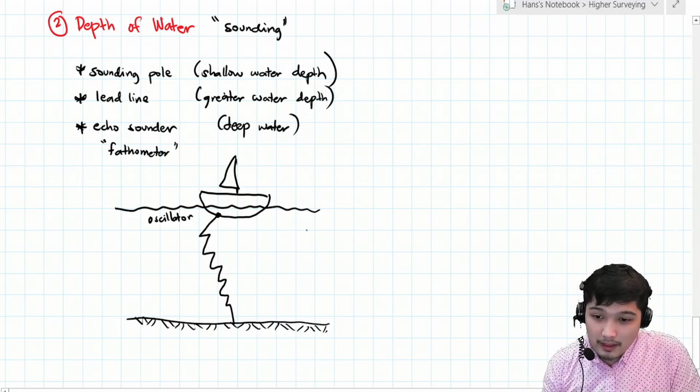Drawing lang konti. Let's say andito yung sounding vessel natin. Ito yung body of water, at somewhere here andito yung stream bed. Ganito yung gagawin doon. Magi-install sa ilalim nung vessel niya, sounding vessel, nung oscillator. Itong oscillator, ito yung apparatus na magta-transmit nung sound waves doon sa ating water. Magta-transmit siya ng sound wave, at yung sound na yun magta-travel downward, hanggang sa ma-reach niya yung bottom, yung sound na yan ay mag-reflect upward. At dito sa kabilang side, nandito naman yung kanyang receiver, o yung hydrophone niya.

Ang gagawin lang dito, i-measure niya lang yung time na nag-elapse from the time na transmit niya yung wave hanggang na-receive dun sa receiver. Kukunin lang yung total time na yun. I-observe yung time, ayan, may check na yan. Ngayon, gagamit na lang tayo ng basic formula ng speed o ng velocity. We know that velocity equals sa distance over time. Yung time natin, ito yung time na na-gather niya from the starting, na nag-travel downward yung sound wave. So that is distance d. At bumalik doon sa receiver, umangat siya ng another distance d. Ibig sabihin, yung total distance traveled ay 2d. Kung gagamitin natin yung formula, magiging 2d over the total time. Ano ba yung nag-travel, class?

Sound. So, kailangan natin yung velocity ng sound. Velocity ng sound is equal sa 2d, yung total distance traveled niya, at saka yung t, which is yung total time elapsed.

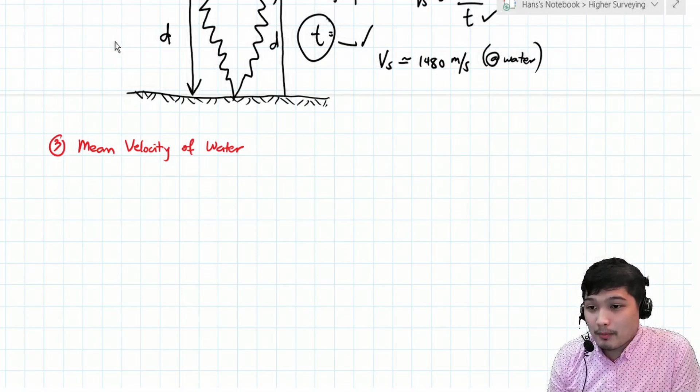Anyways, ang ginagamit nating mga aparatos dito is ito. Para sa surface velocity, gumagamit tayo ng floats. Ang kinukuha natin dito yung surface velocity. Ang itsura niyan, parang float lang talaga, lumulutang.

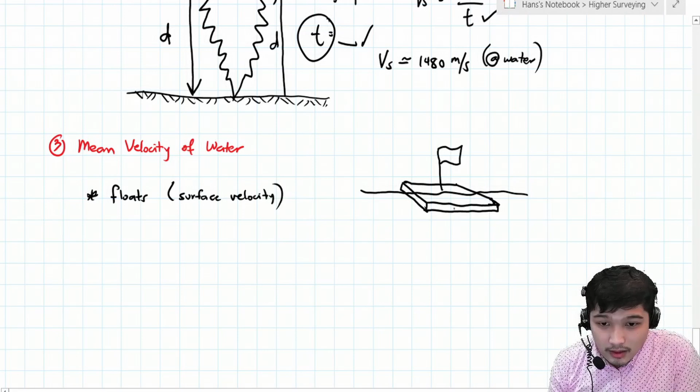So meron ditong floating material. Dapat medyo manipis siya para hindi siya ma-affect dun sa velocity ng wind, parang walang effect yung wind. Dito yung flag na i-observe natin, at dito sa ilalim meron diyang counterweight. Ganyan lang siya, parang ganyan.

Ang gagawin lang natin diyan, titingnan lang natin kung how much nag-travel yung float na yan from one point to another point. I-observe lang natin at a certain distance. May distance, tapos yung time. Distance over time, makuha na natin yung surface velocity.

Para sa mean velocity, ang ginagamit naman natin is itong current meter. Itong current meter, parang elesi lang yan. I-attach natin yan sa parang ganito, mag-attach tayo dun sa vertical rod, para siyang elesi na ito. Dito mukhang bulaklak, pero elesi yan.

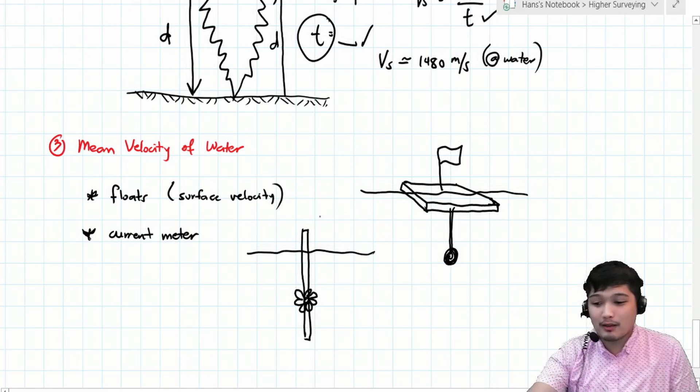Syempre halimbawa nakikita mo yung elesi, may dumadaang tubig sa kanya, ang tendency iikot siya, di ba? Ang gagawin dito, i-record natin how much revolution yung nagawa nung ating current meter, over a specific period of time. Revolution per time, i-convert sa velocity, makuha na natin yung velocity.

Ang kagandahan dito, itong current meter na to kasi, pwede mo siyang ilagay kahit saan. Halimbawa dito, ibig sabihin at that point, kaya mong kunin yung velocity. Gets ba yun? Makuha natin dito ng velocity.

Check. Again, yung current meter, baba natin siya dito, makakuha mo yung another velocity dito. Check, sabi ko nga magkakaiba yung velocity niyan. Lagay mo pa siya dito, another velocity, magkakaiba yung velocity niyan. Ibig sabihin niyan, kaya niyang kunin yung velocity at any point below dun sa ating water. So current meter, yun nga lang.

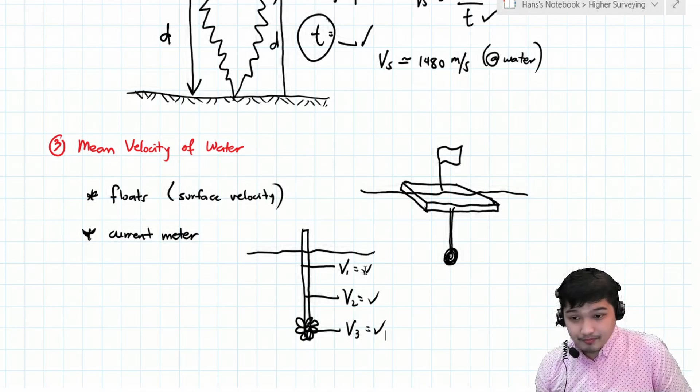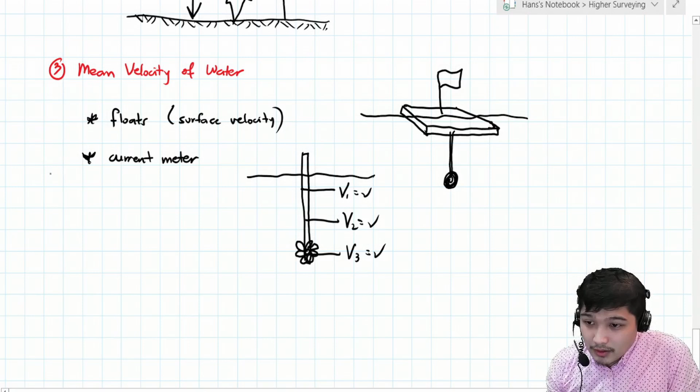O paano makuha dyan yung mean velocity? Paano kunin yung mean velocity? Eto, meron tayong 4 solutions or methods, ito yun, class, using yung current meter. Ito yung mga 4 methods.

Una, yung paggamit ng vertical velocity curve method. Next is yung 2-point method. Next is single point method. At saka lastly is yung integration method.

Okay, so that is using yung current meter, kaya natin kunin yung mean velocity. Isa-isahin natin, simula tayo sa vertical velocity curve.

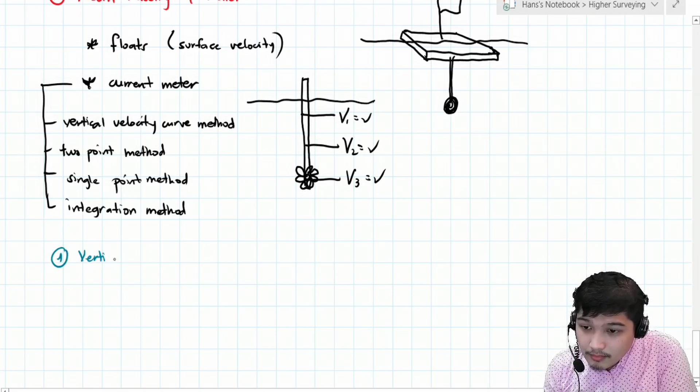Okay, ganito ang gagawin doon. Gagamit tayo dito ng graph. Yung graph is represented by distance d versus velocity v.

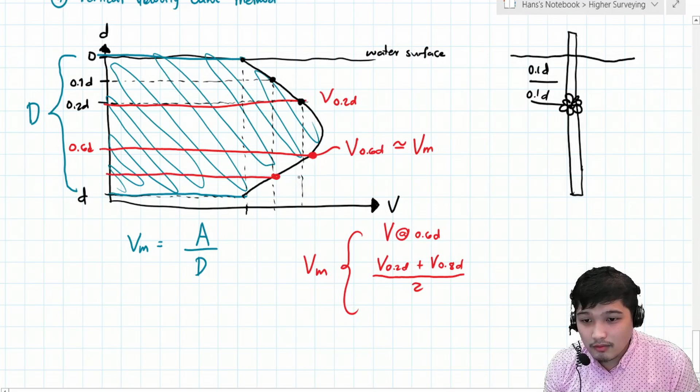Okay, so another observation nila sa class. Yung average, dito sa 0.2, so may velocity dito, velocity at 0.2 depth D. So somewhere here yung velocity ng at 0.8 depth D. So yung average daw nun already represents yung mean velocity.

Di ba itong sa taas, ito yung tinatawag nating velocity sa surface. So kung gusto mo lang daw class kunin yung velocity sa surface, paano ba yan? Katulad nga nito, yung dito sa method na to, surface velocity na kuha natin. Kung tinatamad ka mag-measure ng velocity at any point below dun sa water natin, pwede mo daw gamitin yung velocity sa surface. Pero maglalagay ka ng factor, coefficient niya. So 0.9 of the velocity sa surface, approximately equal daw yun dun sa mean velocity.

Pero using yung vertical velocity curve method, ganito ginagawa dun class. Area over distance D. Itong mga pinrepresent ko na to, ito na yung mga next na method.

So next, ito is two-point method. Ang two-point method dyan is ito, yung 0.2 depth and yung 0.8 depth, 2 points yun. Instead na ilubog mo yung current meter mo at every 0.1 nung depth, ang gagawin mo, lulubog mo na lang siya at 0.2 nung depth and i-record ang velocity, tapos ilubog siya sa 0.8 nung depth and i-record ang velocity, and then average, yun na yung mean velocity.

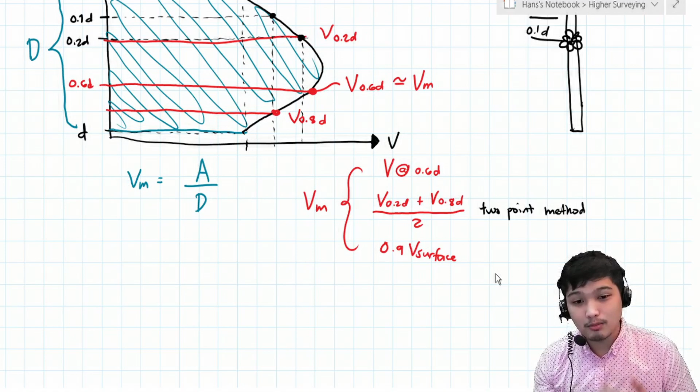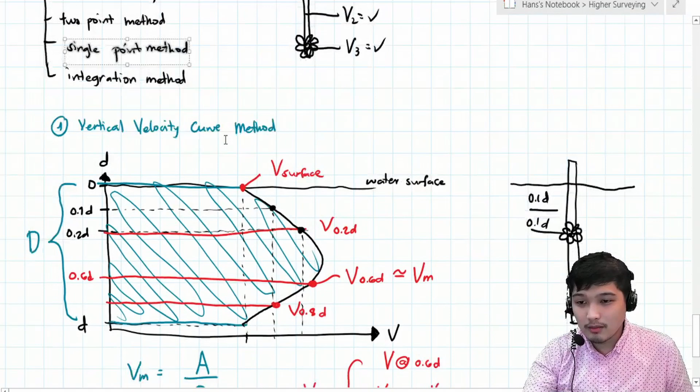So two-point method. O di class, nai-imagine mo na kung sino ang single point method. Ang single point method dyan is itong una. Pwede rin tong pangatlo, pero mas accurate itong una. Imbis na ilubog mo at different depths, ilulubog mo na lang siya at 0.6 nung depth D ng water, yung current meter. Tapos kung ano man yung recorded velocity doon, will approximate yung mean velocity ng ating water.

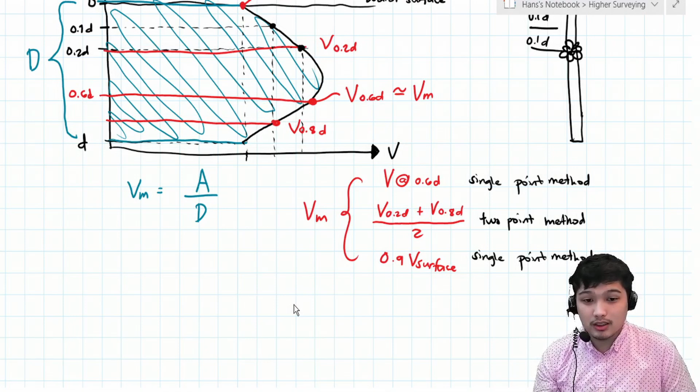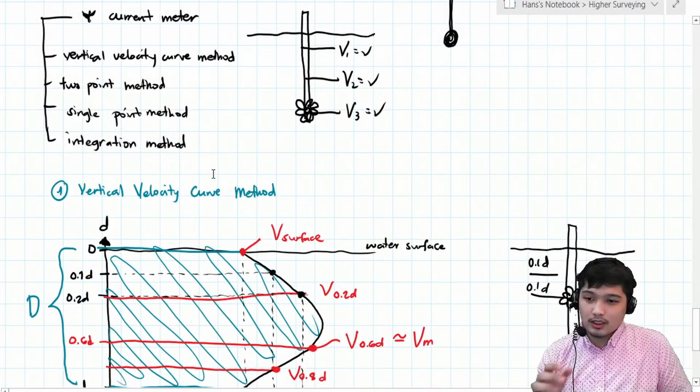Okay, so etong naman tong integration method. Actually hindi ka mag-i-integral dyan. Ang gagawin mo dyan is ilulubog mo slowly. Di ba ito yung current meter natin, slowly ilulubog mo yan. Mula dito sa surface, dahan-dahan, nakikita mo ba dahan-dahan?

Dahan-dahan mo siyang ilulubog class, hanggang sa umabot siya dun sa pinaka dulo. Nakikita niyo ba yung ginagawa ko? Dinadahan-dahan ko ang paglulubog, hanggang sa dulo. And then iaangat naman natin siya dahan-dahan, hanggang sa makabalik siya dun sa surface. At uniform rate yon. So ilulubog natin siya dahan-dahan, ibig sabihin may re-record niya yung mga revolutions at every point.

Kasi dito sa vertical velocity curve na to, may limitation, at every 0.1 lang, pwedeng ganon. O kung gusto mo nga mas accurate, edi ilubog mo na rin paunti-unti. Pero yun nga class, dito sa integration, i-consider mo lahat ng points, as in every point pababa at pataas. So i-measure niya yung number of revolutions.

So ganun lang class, lulubog lang siya. Mag-record siya ng revolution sa taas, medyo konting revolution, tapos pabilis na pabilis pababa, hanggang sa bumababa na ulit yung revolutions niya. Basta ang gagawin doon, i-record niya ang total number of revolutions doon sa tinravel niya from first point pababa, pataas, lahat ng revolutions, and then kukunin niya rin yung total time. So pag may total revolution, may total time, revolution over time converts sa velocity. So whatever yung velocity na yun represents yung mean velocity.

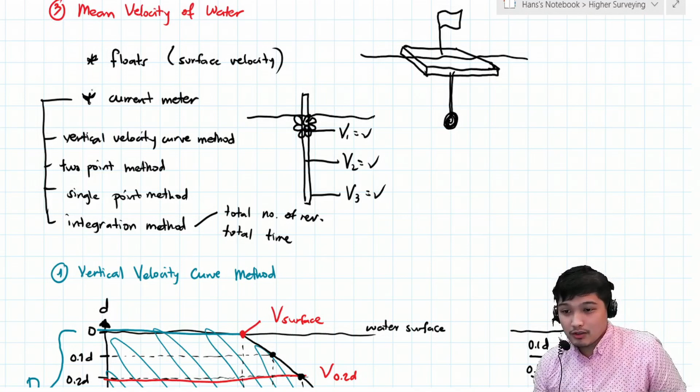Okay, pero yung may computation lang dito class is yung pinakita ko kanina. So baka ito yung mga possible na ma-encounter mo sa board exam, baka lang, baka lumabas, pero hindi pa naman siya lumalabas, pero madali lang naman siyang i-recall. So mas maganda na alam mo na lang din siya. Okay, so ano pa bang next?

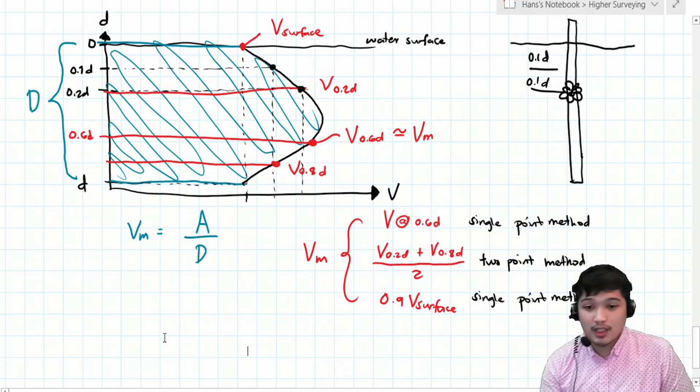Okay so bago tayo mag-proceed sa sample problem natin, discuss na natin yung number 4 na pwedeng lumabas sa board exam, yung pagkuha ng stream discharge. Sana nakakasunod kayo class. Stream discharge, familiar ka na dito sa hydraulics, this one is denoted by Q. Ano yung alam mo na general formula, relationship ng cross-sectional area sa velocity saka sa Q? Di ba alam natin that Q ay equal sa AV. So yung pala, mahalaga yung mga una nating na-discuss.

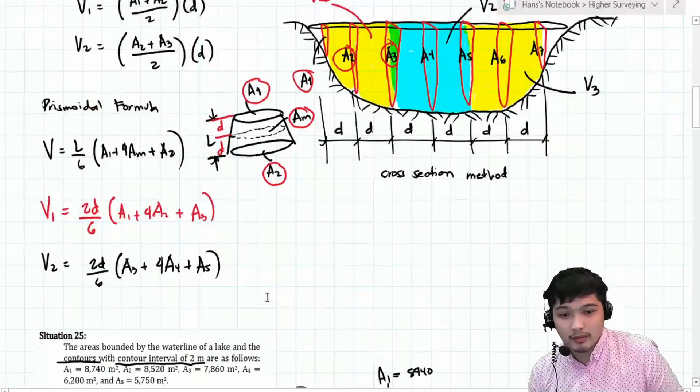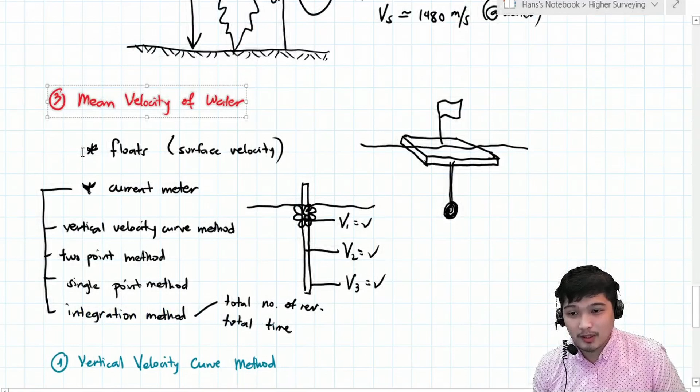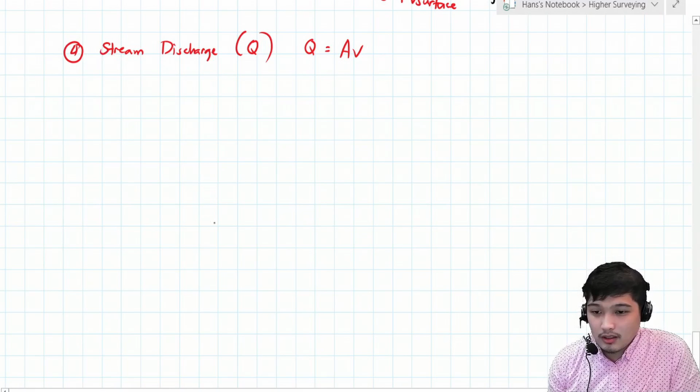Yung mga area, unang-una yun. Nasaan na ba yun? Ayan, mga area yun, di ba related sa area. Next is etong V, yung velocity, so kaka-discuss lang natin paano kumuha ng mean velocity. So pag meron na tayo niyan, kaya na natin kunin ang stream discharge. So let's say for example, ito yung natin, cross-section ng ating body of water, cross-sectional view. So ito yung ating water surface. So anong gagawin class? Ang gagawin dyan is maglulubog ng mga verticals, at uniform interval.

So ayan, parang naglagay yan dito. So wait lang. Ayan, so maglalagay tayo ng mga verticals dito. So copy ko lang.

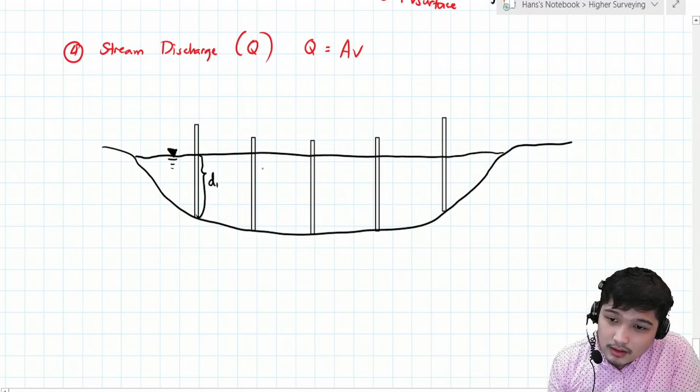Okay, so let's say using these verticals, we can record the depths. So here we'll have D1, D2, D3, D4, and D5. So those are our verticals.

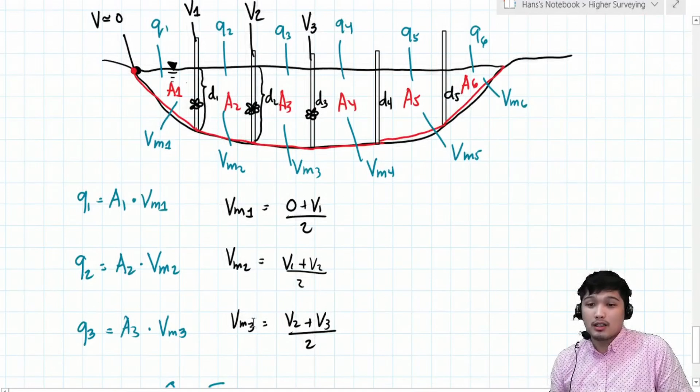Okay, so with that we can get the total Q. So Q using the figure is equal to the summation of the individual Qs, so I don't have to write it all out. So it's like Q1 plus Q2 plus Q3 plus Q4 and so on. Hope you followed, class.

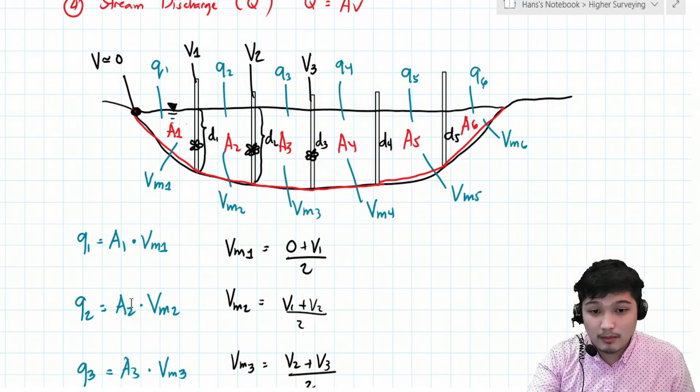Okay, so if you followed, we can now discuss our sample problem, our last sample problem regarding this topic. Okay, wait a moment, class.

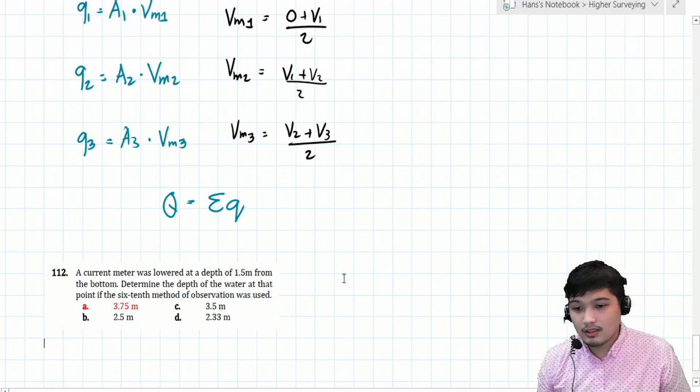Ayan, so mabilis lang. So recall na lang natin yung mga diniscuss natin kanina. So anong tanong? A current meter was lowered at a depth of 1.5 meters from the bottom.

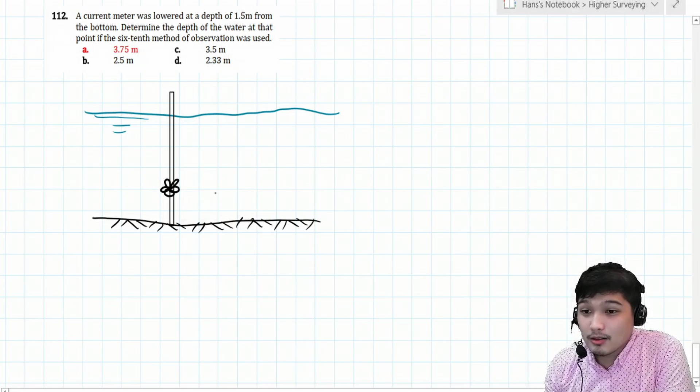Okay, so let's say ito yung ating water surface, and then ito yung bottom, yung stream bed. So magi-install tayo ng vertical, and then naglagay dito ng current meter. Okay na yun, class, no? Easy lang naman yan. So ano sinabi? Lowered at a depth of 1.5 from the bottom. So yung distance niya papunta dito is 1.5 meters.

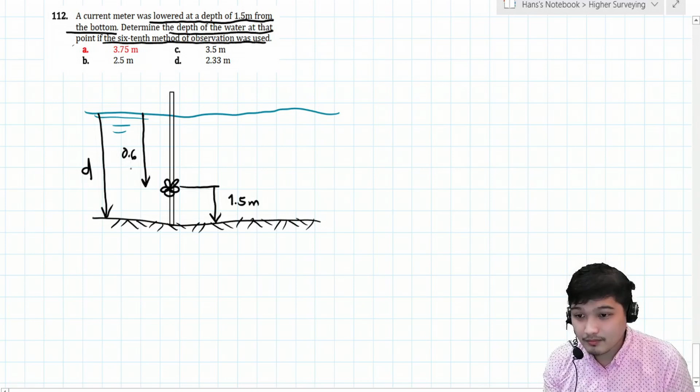So determine the depth of water at that point if the 6/10 method of observation was used. So yung 6/10 method, that is yung 0.6 of depth, no? So if this one represents yung D, so kung 6/10 method, so dapat ito is 0.6 of D, tama? So isin ko lang, ito magiging 0.6 of D. So ibig sabihin, ito pa lang sa baba, edi parang ano yan? 0.4 of D, which is equivalent sa 1.5. So therefore, 0.4 of D na equal sa 1.5.

So masolve natin ang D, which is equal to, ilan yan class? So that is equal sa 3.75 meters. Okay, so that is letter A.

So hindi ko sure class kung tricky ba tong problem. Alam ko ginawa ko tong tricky eh. Kasi kung halimbawa hindi mo alam yung 6/10 method, basta-basta ka lang nag-solve. So sabi mo, try ko nga, gawin kong 0.6 of D, i-equate ko yun sa given na 1.5. So halimbawa na ganyan ka lang, class, o ilan yung D na makukuha mo?

That is 2.5. Nasa choices yata yun, class. Ayun, biniluga mo, class. Ang diin-diin pa ng pagkakashade mo, class. Ayun, okay, easy 1 point. Yung pala, class, mali no? Kasi hindi mo alam kung ano yung 6/10 method. Pero dahil diniscuss na natin siya, hindi ka na magkakamali doon. Okay? So next, wait lang.

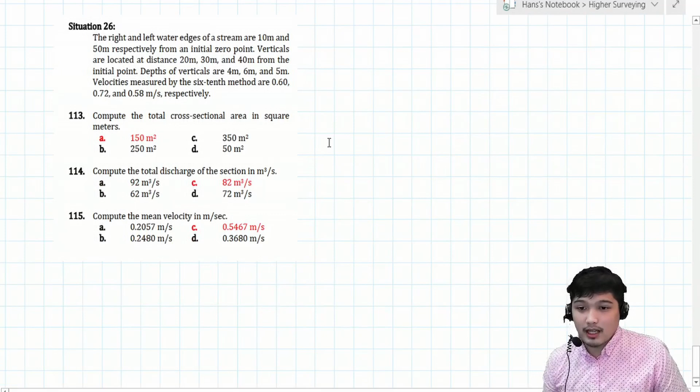Okay, so situation 26 tayo, class. So sabi, the right and left water edges of a stream are 10 meters and 50 meters respectively from an initial 0 point. The verticals are located at distance 20, 30, 40 from the initial point. Depths of verticals are 4, 6, and 5. Velocities measured by 6/10 method are 0.6, 0.72, 0.58 respectively. So tinatanong, compute the total cross-sectional area, compute the total discharge, compute the mean velocity.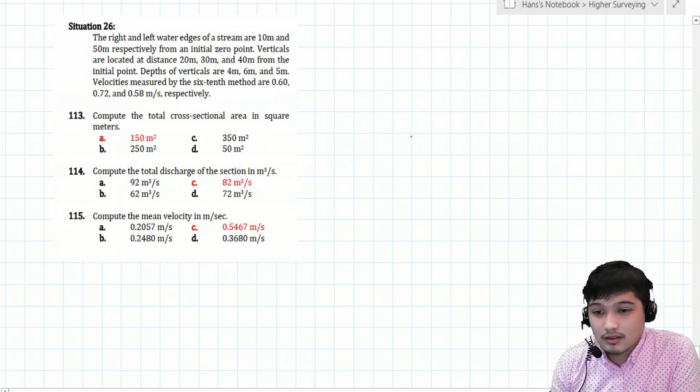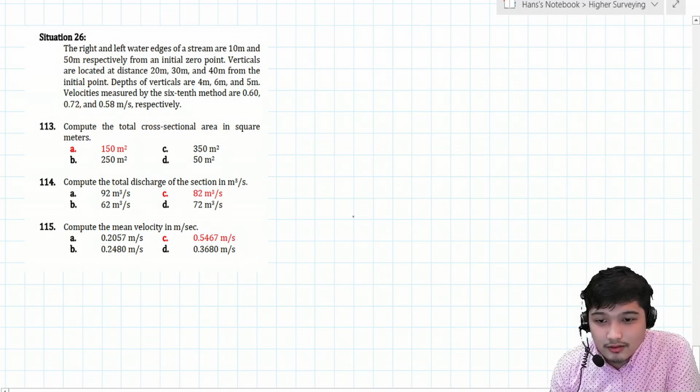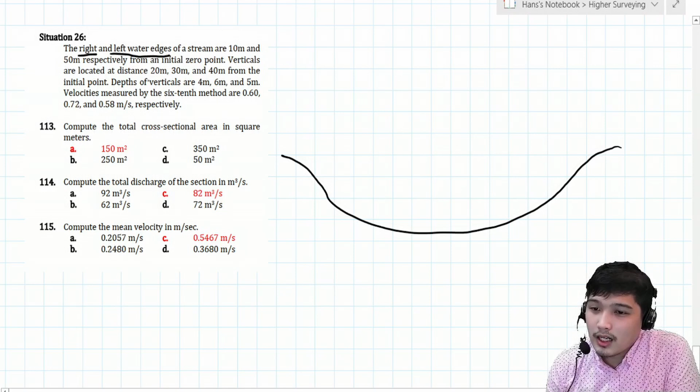Okay, daming tinatanong. So anyways, drawing muna natin siya, no? So adjust ko lang to. Ayan, so let's say ito yung ating section. So the right and left water edges are 10 and 50 meters from an initial 0 point. So parang naiisip ko, andito dito yung 0 point, no? Ito yung 0 point. So from 0, andito dito yung, diba, ito yung natin, water surface.

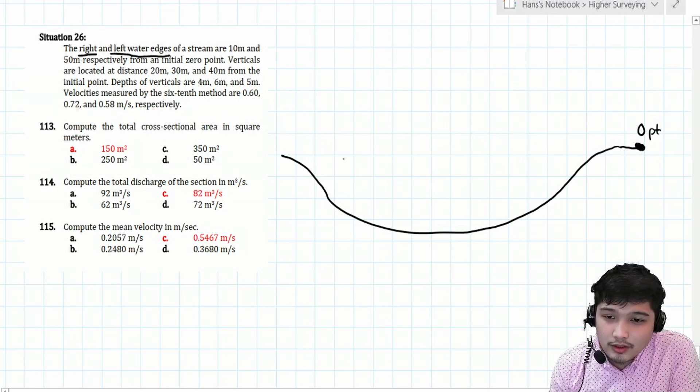So papunta daw dito, ito yung right water edge. Okay, right water edge, that is what? 10 meters from the initial 0 point. And yung etong left, left water edge, so from the 0 point, ang distance naman niya daw is ilan? 50 meters. So ibig sabihin, parang lumalabas 40 meters to.

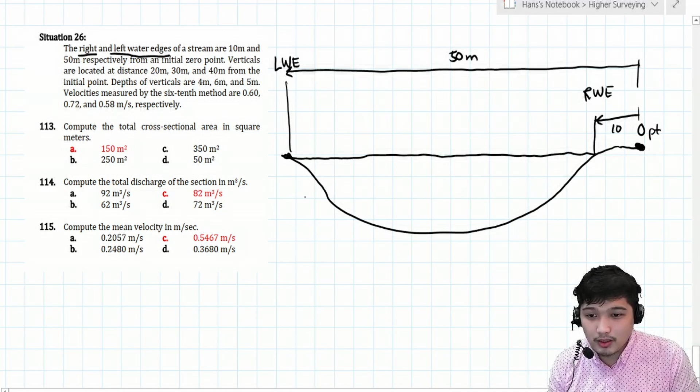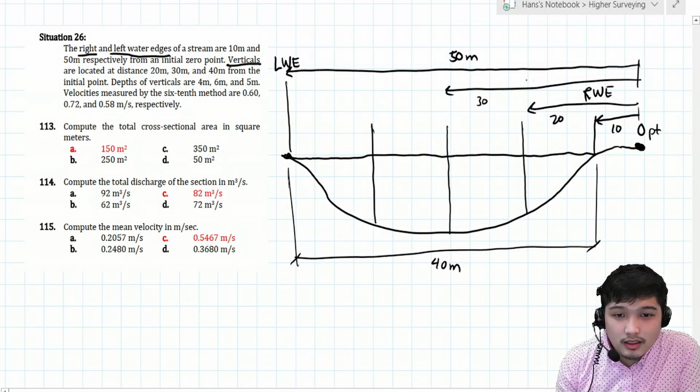Okay, next. So naglagay daw siya ng verticals at 20, 30, 40. So kung 10 ito, so andito dito yung 20, no? 20, ayusin nga natin. So let's say yan na lang, no? 20, 30, 40, gets ba yan? So from the 0 point, so this one is yung 20, 30, and then ito yung 40. So parang technically, parang ang distance nito is every 10.

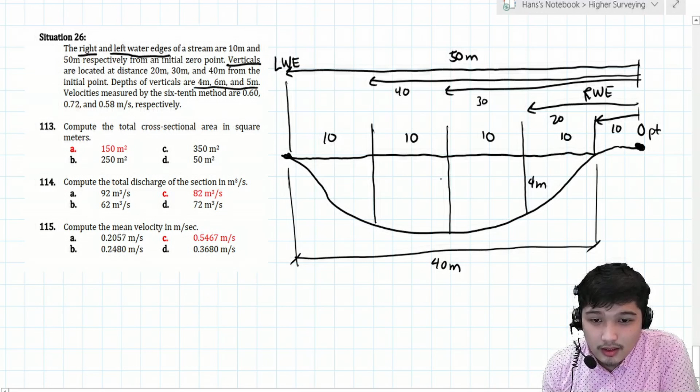Okay, so ayan, at ano nang next? Depths of vertical are 4, 6, and 5. So dito, 4, ito, 6, ito is 5, so nakakasunod. Kasi nagsimula siya dun sa malapit sa 0. So parang dito tayo nagsimula sa right, papuntang left. So next, velocities are 0.6, 0.72, and 0.58. So lagay ko yung class ng red na lang siguro. Dito, sa first vertical niya, 0.6. Ito, 0.72. Dito is 0.58.

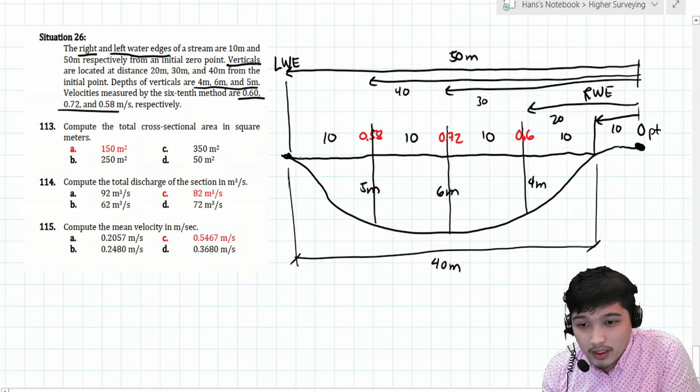Okay, so una, tinatanong total cross-section area. So madali lang yung class, no? So magiging dito? Assumption, ito magiging straight line, straight line, straight line, and straight line. Okay? So tawagin natin to class as 1, 2, 3, and 4. So for the total area, so that is equal sa area 1, area 2, area 3, and area 4.

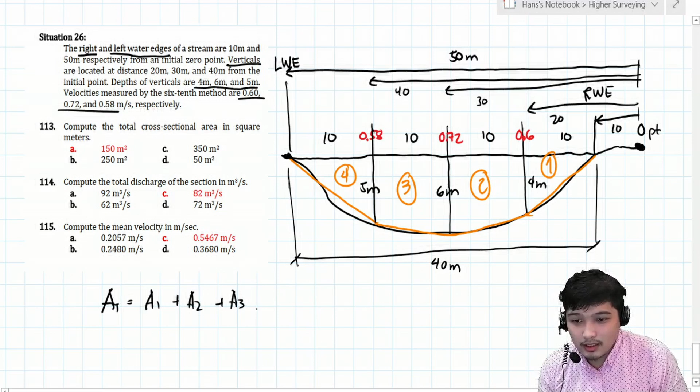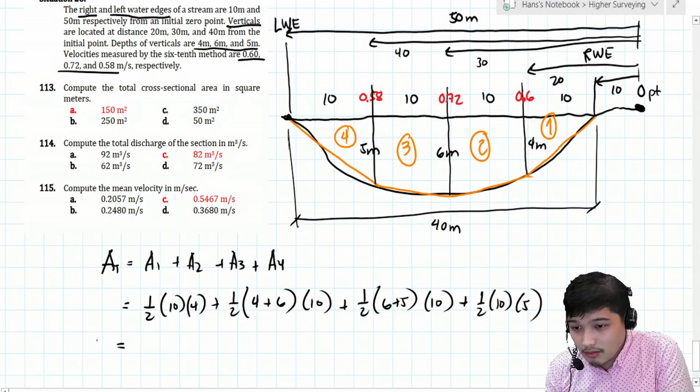So using the figure, paano kunin yung mga area? So yung area 1, triangle, no? So that is 1/2, base is 10, height is 4. Yung area 2, trapezoid, so 1/2, B1 plus B2, so 4 plus 6, and then times 10. Okay, plus trapezoid again, so 1/2, 6 plus 5 times 10. Then plus triangle 1/2 base times the height. Okay, so using that generated equation, ilan ang total area?

So anyways, kunin na rin natin isa-isa, no. So ilan tong para sa area 1 kasi gagamitin natin siya later on. So ilan tong area 1? So ito magiging 20. Ito 50 ba yan, class? Ito 11 times 5, 55. Try na lang natin, class, no? Board exam naman eh, kailangan pag board exam, sure. So next, ito.

5 times 5, 25. Okay, so mamaya gagamitin natin sila. So ilan yan? 20 plus 50 plus 55 plus 25, equals 150 square meters. So that is letter A. Correct. Okay, so next, compute the total discharge.

So para sa discharge, kailangan natin kunin muna yung mga mean velocity. Para dito sa area 1, VM1, sa mga dulo ang assumption velocity dito is 0, at dito sa kabilang dulo 0 rin. So VM1 magiging 0 plus 0.6 divided by 2, that is 0.3.

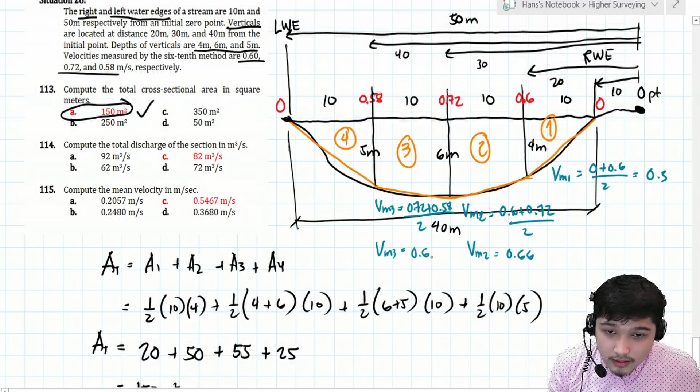Okay, para sa area 3, VM3 ay equal sa average ng magkabilang dulo, 0.72 plus 0.58 divided by 2. So VM3 equals 0.65. Okay, and then for the last area, VM4, yung end velocities, 0.58 plus 0 divided by 2. Ilan yung mean velocity dyan? 0.29.

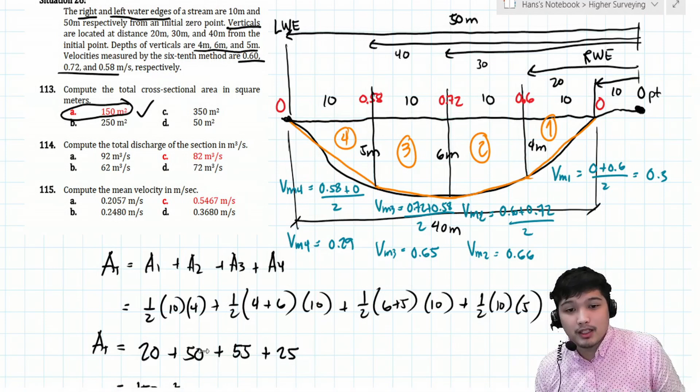Okay, so meron na tayong mga mean velocity. Kaya natin kunin yung total Q. Yung Q ay equal sa Q1, Q2, Q3 plus Q4, na equal sa A1 VM1 plus A2 VM2 plus A3 VM3 plus A4 VM4. So yung individual areas equal saan?

So area 1, 20, times VM1 0.3. Plus area 2, 50, times mean velocity 2, 0.66. Plus 55 times 0.65. And then lastly, area 4, 25, times VM4, 0.29. So nagets ba yun, class?

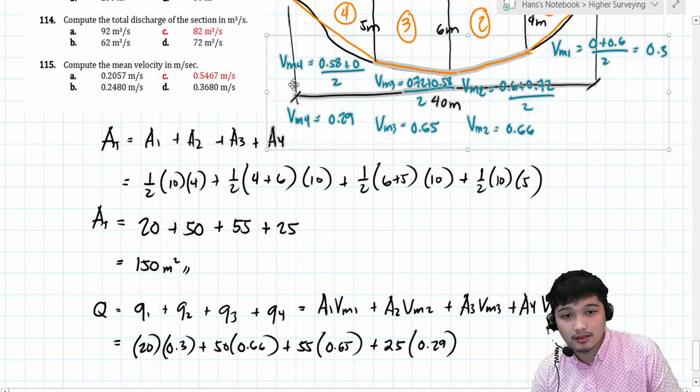Nagets na. Paano natin nabuo to? Base lang kayo sa figure, ito, saka ito yung mga individual areas. Okay, so therefore, ang total discharge now ay equal saan yan, class?

So sagot is 82. Ang unit, di ba ito naka-square meters, tapos yung mga velocity naka meters per second, no? So therefore, magiging 82 cubic meters per second. So that is letter C, correct. Nakuha? Madali lang yan, class, no?

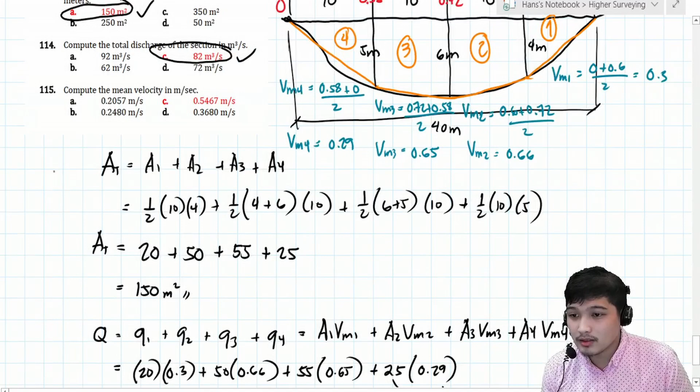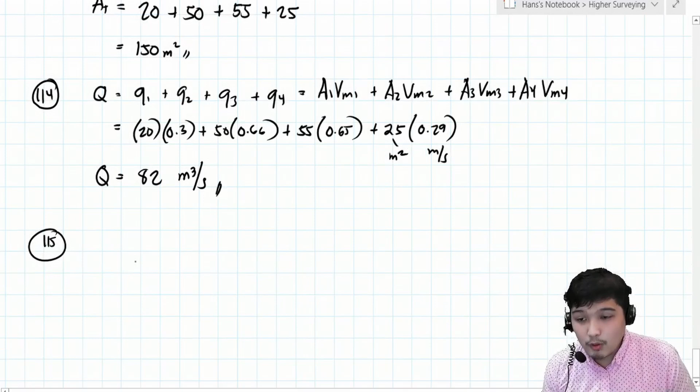So next, compute the mean velocity. Paano ko kunin yung mean velocity? Anong number ba to? Ito yung 113, 114, so number 115 na tayo. Para makuha yung mean velocity, gagamitin natin yung general na yung total Q ay equal sa total area times yung total velocity.

Yung velocity dito, yun na yung mag-represent ng mean velocity. Okay, so lalabas dito 82 cubic meters per second, equal sa total area na nasolve natin kanina, 150 square meter, and then yung mean velocity. Ilan lumalabas na mean velocity, class? That is 0.5467 meters per second.

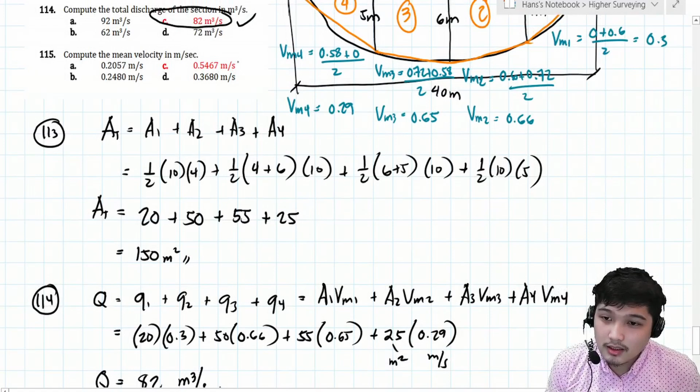Okay, so nandun ba yan? 0.5467. Okay, so that is letter C, correct. Okay, nakasunod ba, class?

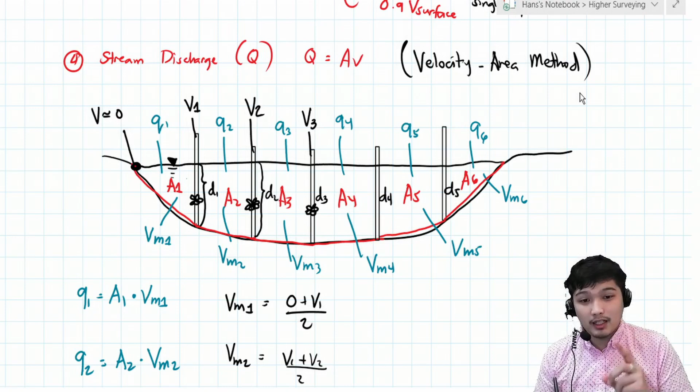Okay, so nga pala, class, ang tawag dito sa method na to is velocity area method. So we know naman, pagdating sa hydraulics natin, marami pang ibang method o ways para makuha yung discharge, meron tayong gumagamit ng weirs, or yung mga formula na, Chezy formula, Manning's formula. Yung mga ganun, class, hindi na natin siya itatakal dito kasi yun na yung subject na hydraulics. So kung surveying ang pinag-uusapan, ito yung isang method na hindi mo pa na-encounter, yung velocity area method. At ganyan siya ginagawa. Sana nagets mo yung topic natin.

Okay, may problem pa yata tayo. So last two problems tayo, class, no? Last two, bago natin end ang discussion natin regarding sa hydrographic survey.

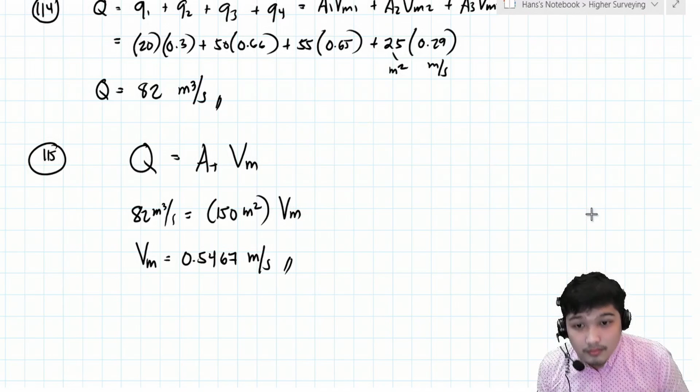Okay, so number 116. To determine the depth of water, a fathometer is installed in a boat to produce the sound, transmit it downward, receive, and amplify the echo. If the intervening time interval is 0.14 seconds and the speed of sound in water is 1,500 meters per second, determine the depth of water at which the sounding was made.

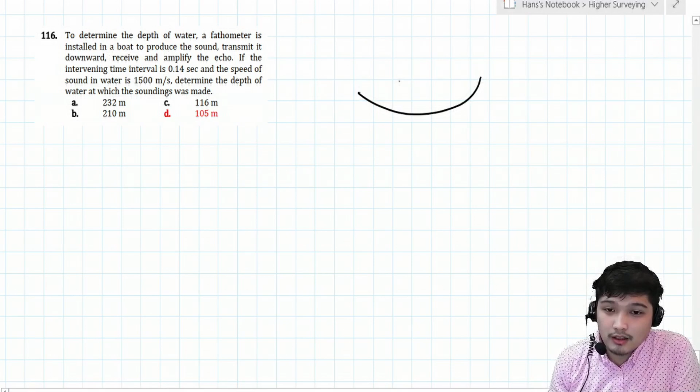So illustrate na lang natin katulad ng ginawa natin kanina. Parang ito yung echo sounder, ito yung sounding vessel niya. Dito yung surface, ito yung ilalim. Ayan, pwede mo naman i-direct solve yan, class, using yung formula na pinakita ko kanina.

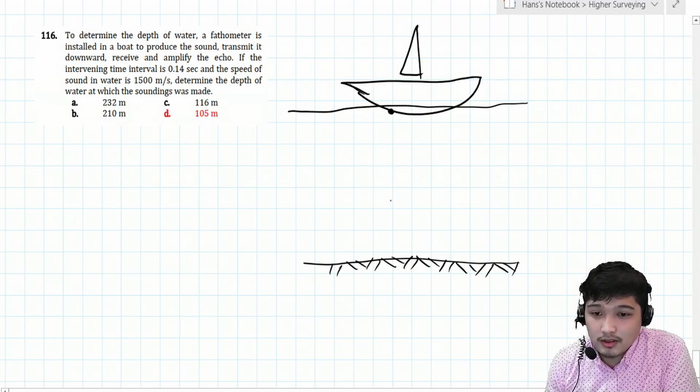Pero drawing lang muna natin, no? Try natin imaginein ulit yung nangyari para mas ma-absorb natin siya. Yung fathometer na nag-transmit ng sound, okay, and then ni-reflect papunta dito, and then yung total time is 0.14 seconds.

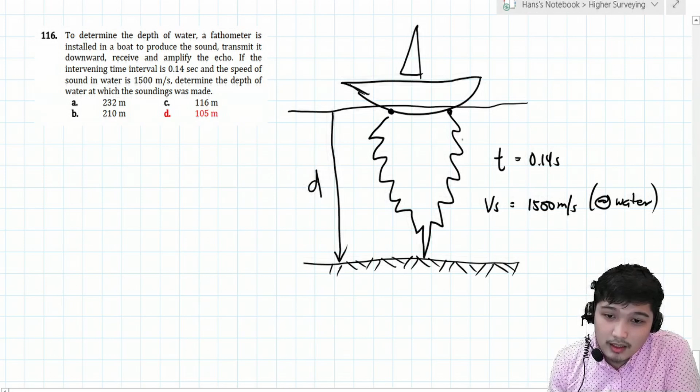So given velocity ng sound sa water ay 1,500 meters per second. Ilan daw yung total depth? Yung tinatravel ng sound is D pababa and then another depth D pataas. Okay, so using yung formula na velocity equals distance over time, velocity ng sound equals total distance 2D over total time 0.14 seconds. Okay, palitan natin to ng 1,500... simple as that, makuha na natin yung depth ng water. So ilan yan, class?

So, sagot, 105 meters. Okay, so that is what? Letter D. So very simple na. So that is so long, ano, yung formula or yung dinidiscuss na topic.

Kung hindi mo alam, class, kung paano nag-work yung fathometer or yung echo sounder, hindi mo marirealize na 2D, no, na yung gagamitin mong distance. So baka magamit mo, velocity equals distance over time. Pag yun yung ginawa mo, class, ginawa mo, 1,500 is equal to D over 0.14. Nasa choices rin yung sagot, which is 210. So again, mamadali ka na naman, bibilugan mo na naman ng madiin. Uy, easy 1 point, top 1 na ito. So mali pala, class. Mas maganda, alam mo, yung concept behind that one.

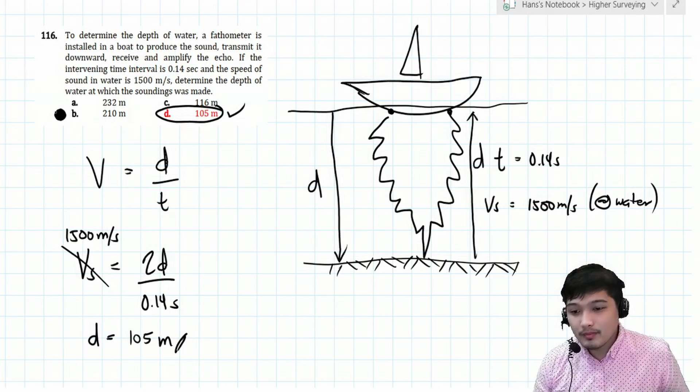Okay, so last problem tayo. Wait lang. Okay, so ayan.

Sabi, a hydrographic survey was conducted for the purpose of locating channel depth. The survey party consists of a shore party and the boat party. So on the shore party, a staff gauge was established in a secure place, to such a depth that it will give a definite reading. The staff reading at the instant that the sounding was taken was 3.25. Nagigets nyo ba, class? Basahin nyo lang din: the staff reading at the instant that the sounding was taken was 3.25. The depth of sounding as recorded was found to be 9.67. The elevation of zero mark on the staff was 155.76. Determine the elevation of the bottom of the channel. Na-imagine nyo ba yun, class?

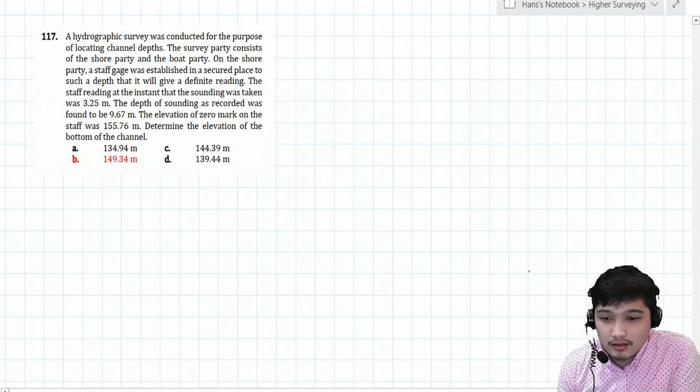Ganito yon. Very simple lang din naman to. Ito yung parang shore party. Let's say, ito yung ano. Okay, wait lang, wala pa yung party. Ayusin natin. Parang ito yung ano, yung water surface. Ay, lagyan natin ng ganyan. Yung shore party, pag sabi mo shore party, edi nasa shore lang sila. Tapos yung boat party, edi nasa ano sila? Nasa boat sila. So andito yung boat party.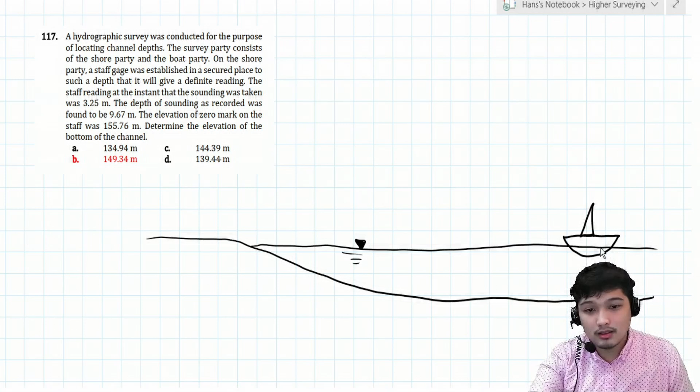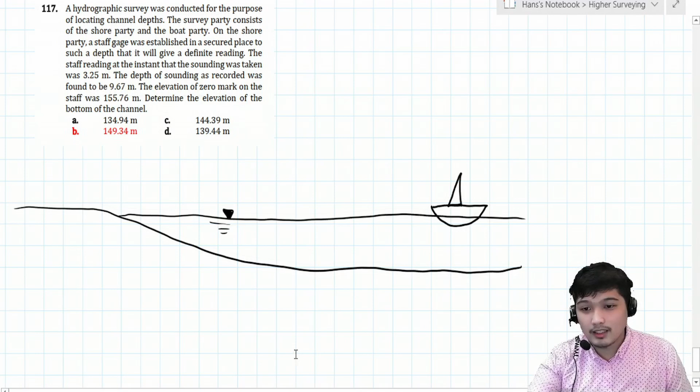Okay, tapos using any method ng pagkuha ng depth ng water. Na-measure daw nila yung depth dito, nakikita niyo pa ba? Hindi na, no? Saan ba? Lipat ko to. Dito. Yan, kita na yan, no? Sabi, using any methods na pagkuha ng depth, so below dun sa ano, or at exactly dun sa location ng boat, yung depth daw dito is 9.67 meters. Okay, nandyan sila.

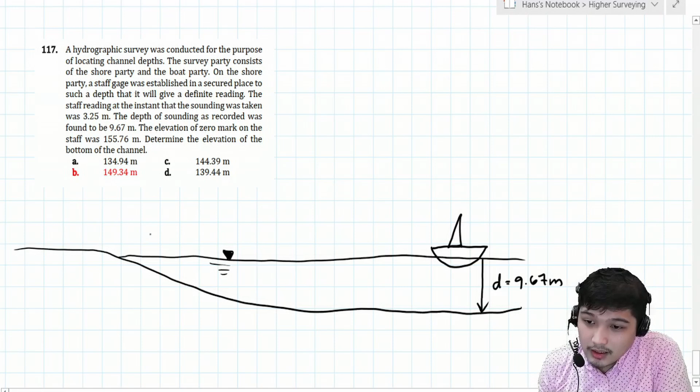Tapos yung shore, or yung shore party, okay? So naglagay daw sila ng ano, staff gauge, no? Parang ano lang yun, reading rod. So naglagay sila ng rod dito. Okay, and then anong sinabi, class? The staff reading at the instant that the sounding was taken was 3.25. So the moment daw neto, class, nung time na nag-observe sila, di ba, may tumatama ditong water. So ang naging reading daw dito is...

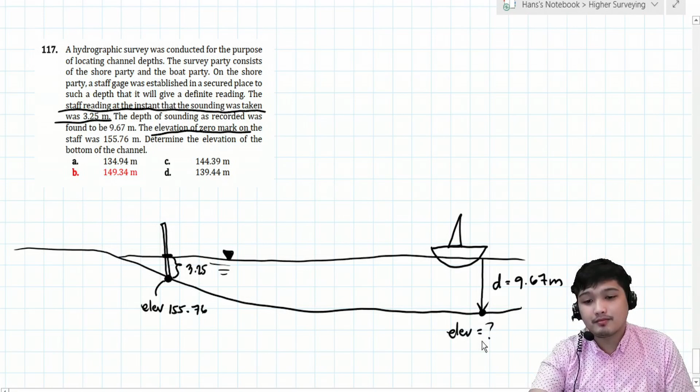3.25. Okay, so next, the elevation of the zero mark. Asan ba yung zero mark neto? Eh, di nasa ilalim, di ba? So yung elevation daw neto is what? 155.76. So ang tinatanong, ano daw yung elevation nung bottom ng channel? Na-imagine nyo ba yung nangyari? Ganun lang siya ka-simple, class, no? So long as na-interpret mo correctly yung sinasabi sa problem, madali na lang siyang masolve.

Okay, so anong gagawin natin? Paano i-analyze? So from the given elevation, angat tayo sa level line. Di ba parang ano to, class, level line. Angat tayo dyan. So from the level line, ayan, hindi level yung sulat ko. So from the level line, anong gagawin? Bababa naman tayo dito. So makuha na natin yung elevation, no? So from that case, elevation, no, nung bottom ng channel ay equal saan? So mag-start tayo sa 155.76, angat tayo ng 3.25, baba tayo ng 9.67. So as simple as that, makuha na natin yung elevation ng bottom ng channel. So that is how much.

Okay, so sagot is 149.34 meters. Okay, so that is what? Letter B. And we are correct.

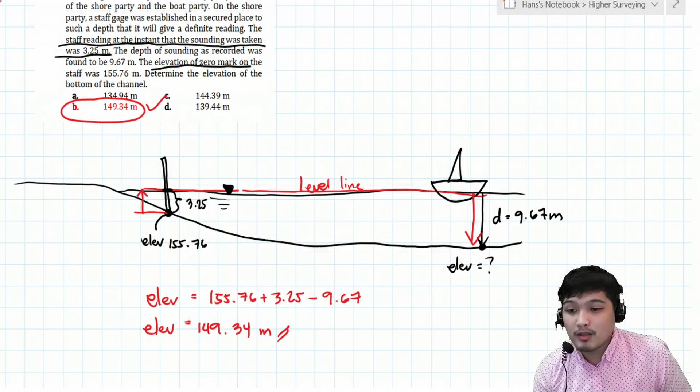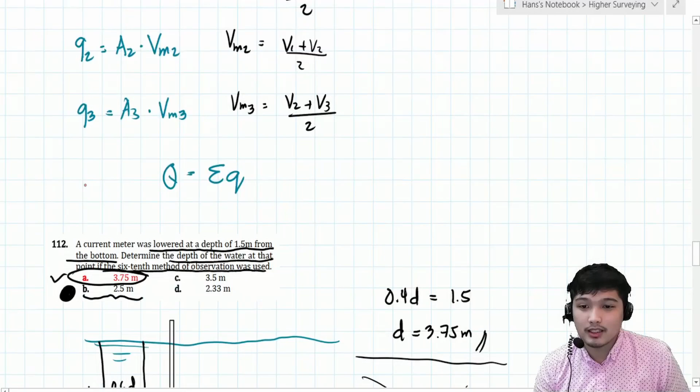Okay, so again guys, ganyan lang mga problem na encounter mo regarding sa topic na to, sa hydrographic survey. Hopefully nasundan nyo, no, yung dinidiscuss ko, and ayun, na-imagine nyo, no, na madali lang din siya. So mahalaga lang is familiar ka sa mga pinakita ko kanina.